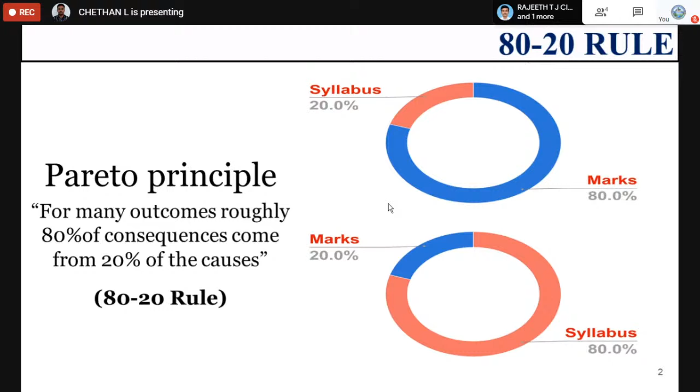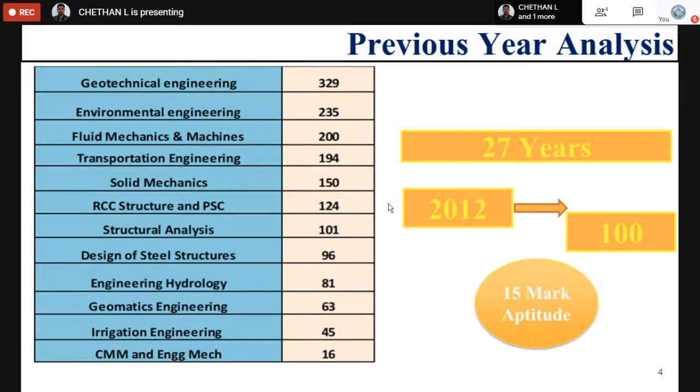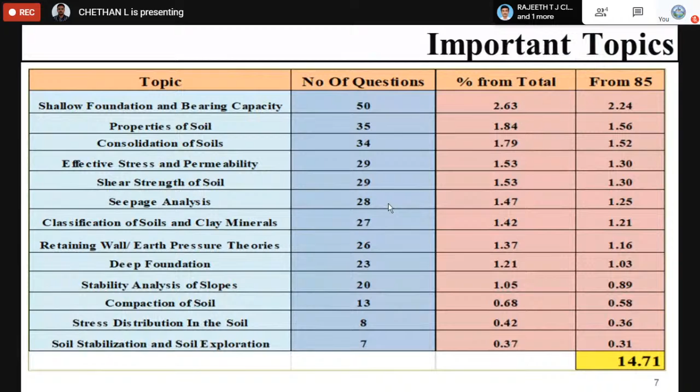So welcome you all for the day 6 session 2, especially on soil mechanics. As we studied in the previous session, session 1 of soil mechanics, we went through some basic analysis using the Pareto principle, saying that if you study 20% of the syllabus, you can get 80% of the marks. Then we analyzed some basic details regarding the previous year analysis, and took some important topics, especially important subjects, studying where particular subjects have given more importance. So then we came up with a distribution of marks for dividing the strategies. These are all things we discussed in the previous session, session 1. If you haven't looked at the previous video, please go and watch it for more information.

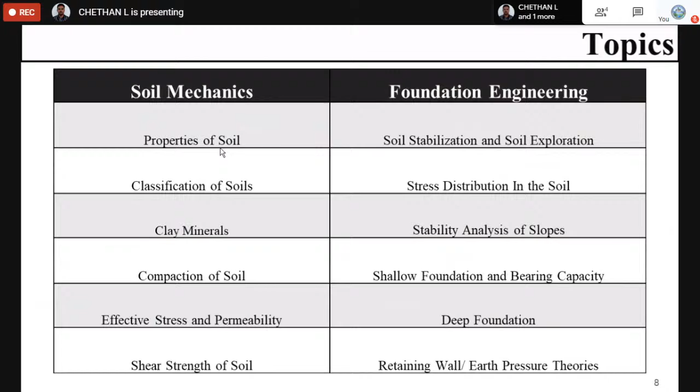As we talked about in the previous session, we covered the first 3 topics: properties of soil, classification of soil, and clay minerals of soil. So today I will be talking to you about compaction of soil, effective stress, permeability, as well as seepage analysis of soil. If time permits, I will move on to shear strength of soil. As I informed previously, the foundation engineering topics and all the advanced topics of geotechnical engineering will be covered by our HOD, SK Prasad sir, in future sessions. So this is my content.

These are the things we are going to discuss today. There are 5 major topics. One is that preparation is the main key for getting into any examination or clearing it. I will be talking about what compaction is and the important things to keep in mind while facing compaction problems. Then total stress, effective stress, and pore water pressure. I will also talk about seepage analysis, flow net, and other topics. At the end of these 4 topics, I will take you through previous years' question papers, where questions asked over the past 27 years will be covered as much as possible.

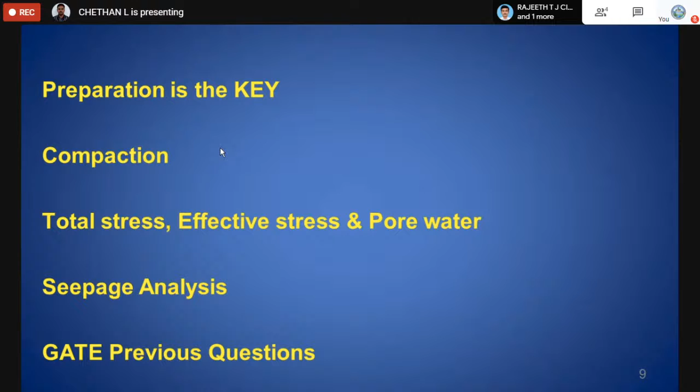Let me go to the first one, that preparation is the key. As you all know, in anything, whether it's a game or life, you won't get anything you don't fight for, but whatever you get is always a fight, right? So remember that. Whatever you want to get, it's always a fight. Don't give up on anything. Don't face anything in life with doubt in your head or mind. If you want to win in some game or in anything, and you already have doubt in your mind, you can't do that. So how do you overcome the doubt? This is the key: there is no shortcut to success. Success can only come through hard work. That is the key for preparing for the GATE exam or any exam.

So as I mentioned about the second topic, today I will talk to you about compaction. What exactly is meant by compaction? As the term itself indicates, compacting any material.

Here we are talking about the soil, so I will be talking about compacting the soil. Basically, compaction is a mechanical method of improving the property of a soil. You can observe here, if you take loose soil and put some compaction energy along with water, the water will act as a lubricant to help compact the soil. So finally, we will get the compacted soil. This is a mechanical process where water has been added to help densify the soil.

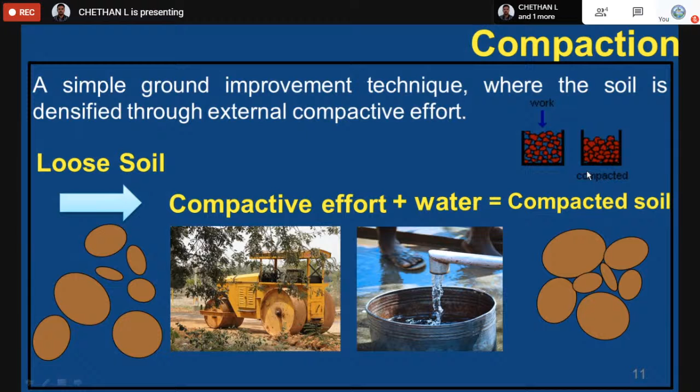Simply, you can say it is a ground improvement technique where the soil has been densified through external compactive energy. So here you see before the work, that is the loose soil, and after the compactive effort has been added, you will get the soil like this.

Okay, what is the basic principle involved in compaction? If you understand the principle involved in compaction, you can easily get at least 1 or 2 marks in the exam. Rather, if you understand the concept, in any examination you can get marks. The concept is simple. What is the principle involved?

As we keep on adding water content to the soil and keep increasing the compactive effort, the dry density of the soil will keep on increasing. It will increase up to a certain limit, then it will start to decrease. That is the basic principle. But how does it take place?

For example, when the loose soil starts getting lubricated, that is, when you start adding water to it, whatever voids are present in the dry soil start filling up with water, and the lubrication process takes place. When lubrication starts taking place, the soil particles present in the soil will reorient themselves, because there is an amount of compactive effort lying over it.

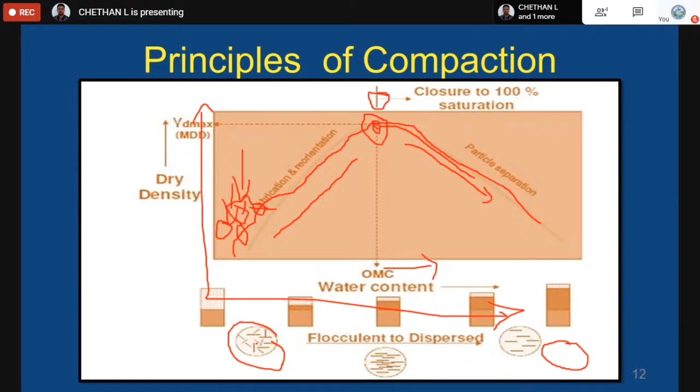One more thing to observe is that whenever we increase the water content to get the desired dry density of the soil, the flocculated structure of the soil will orient itself into a dispersive structure. As we studied in the previous class regarding flocculated structure and dispersive structure, in flocculated structure, the permeability of the soil will be more because of its irregular orientation.

When you keep on adding water to the particular loose soil, you can observe the water will try to enter into the voids.

It will enter into the soil, and even though you are providing the compactive energy to the particular soil, it will try to get more and more compressed.

As the soil is getting more and more compressed, which increases the densification of the soil, at one point, that particular point we call the optimum point.

At the optimum point, the amount of voids has been completely filled with water, and the quantity of air present is almost equal to zero. When we reach that amount, we will obtain the optimum dry density as well as optimum water content.

We also observe that reorientation of the structure will take place. Whatever flocculated structure of the soil particles was present in the beginning, it is going to reorient itself. When they start to reorient, we can expect more densified soil.

So after, if you keep on increasing the water content, whatever densified soil was present at the optimum content is again going to be very free. When they start releasing the compression stage, the amount of density we can achieve will be reduced, or it will be minimum.

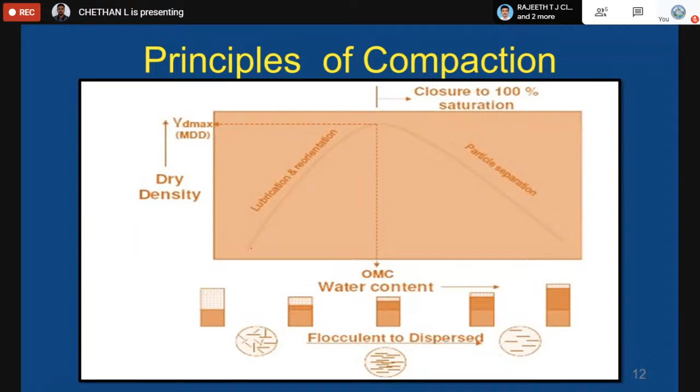As we all know, when we talk about the principle of compaction, this is the graph which has high importance in any case, because whatever practical applications we have been doing, it is only applicable on this particular graph. So what this graph shows is the compaction graph, or compaction curve, as we can call it.

Here you see, this is the point where we can obtain the optimum moisture content and optimum dry density of the soil. If the soil has an optimum moisture content, it can be exactly divided into the center where the optimum dry density has been obtained, and the left side part which is called dry of optimum.

Because at the dry of optimum, the soil has an ability to absorb water, which has an ability to lubricate. So once it reaches that particular point, it has been completely lubricated and has obtained its maximum dry density. Next, it will move on to wet of optimum.

When the soil moves to the wet of optimum, the amount of dry density will keep on decreasing even though there is an increase in water content. So wet of optimum, the optimum, it is a division.

The division is the point where we can get the optimum dry density and optimum moisture content, where towards the dry of optimum, the soil always has an ability to absorb water content, and towards the wet of optimum, the soil doesn't have an ability to absorb any amount of water.

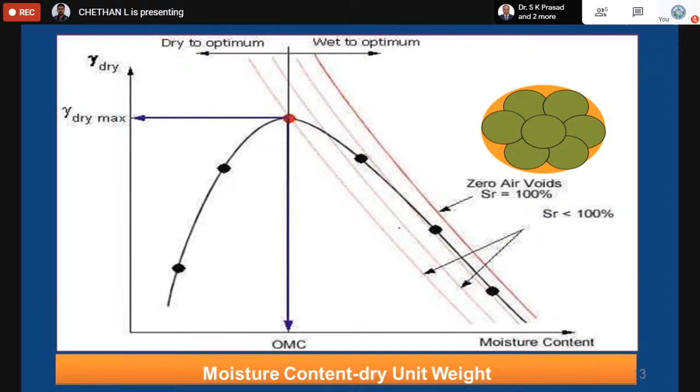When the soil is at the 100% saturation line, or zero air void line, you can observe in this simple diagram that the soil particles present here have been completely compacted, and the space shown in orange, which indicates the void space, has been filled with water. So how do we calculate the zero air void line when saturation and water content are given? Let me show you.

Before going to the problems, let me take you through a few things we have to remember, since sometimes they will ask questions based on this principle, which was developed by Proctor.

In 1933, Proctor gave a relationship between the amount of soil and the variation of water content, and he devised particular methods to calculate the compaction in the field as well as in the lab.

We know there are two tests used to calculate the compaction in the field as well as in the lab: the standard Proctor test and the modified Proctor test.

The procedure for both standard Proctor and modified Proctor is the same, but the difference lies in the compactive energy. The hammer used in the standard Proctor test is 2.5 kg, and in the modified Proctor test it is 4.5 kg.

The volume of the mold is 1000 cc, and the hammer falls from a height of 30 centimeters in the standard Proctor test and 45 centimeters in the modified Proctor test.

The only variations to observe between standard and modified Proctor are the compactive energy and the number of layers used to compact. In standard Proctor we go for 3 layers, and in modified Proctor we go for 5 layers, with increasing compactive effort.

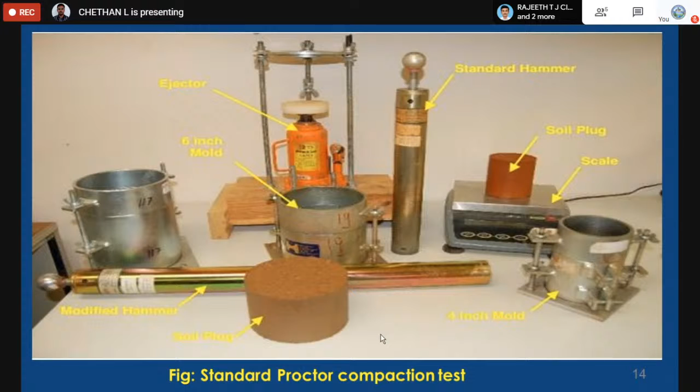This diagram shows the components used for the compaction test, and we know the standard procedure to follow according to BIS standards for both standard and modified Proctor tests.

Here is one important point to note: sometimes they will ask a question about how to calculate the compactive energy, or how to relate it.

To calculate the compactive energy, E equals N times n times W times H divided by V. This is what we have to remember.

What do you mean by N? Number of blows per layer, that is how many blows we provide in each layer, which is 27 blows in both tests. Then what is n? The number of layers. In standard Proctor test we go for 3 layers, and in modified Proctor test we go for 5 layers. What is the weight of the hammer?

The weight of the hammer we are going to use in standard Proctor is 2.5 kg and in modified Proctor it is 4.5 kg. This is W, the hammer weight.

When it comes to height of drop, the free fall of the hammer in standard Proctor is 30 centimeters and in modified Proctor it is 45 centimeters.

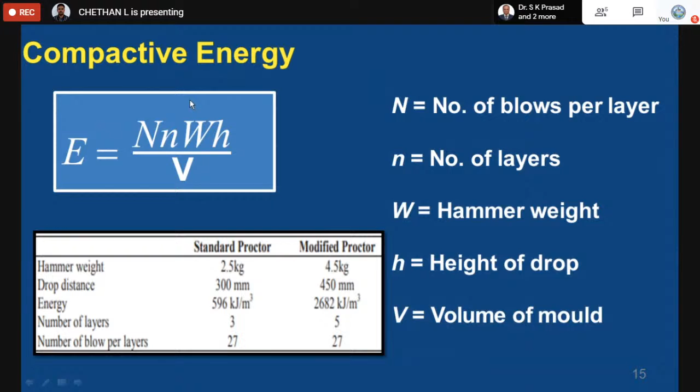The volume of the mold we preferably use is 949 cc, or sometimes we can also consider it as 1000 cc. This is the equation we have to remember to calculate the compactive energy: E equal to N into N into W into H divided by V.

As we all know, when we are talking about compaction, it's all about considering the density of the soil. To calculate the bulk density of the soil, the basic thing we have to know is density equal to mass by volume, or weight by volume.

If it is dry density, we have to relate it with the dry weight along with the water content. But when we are using the compaction curve, dry density can be calculated using gamma divided by 1 plus W.

But if you are using a zero air void line, or calculating the amount of air voids, how do you calculate it? Gamma D can be calculated using 1 minus Na into G into gamma W, divided by 1 plus WG. Here Na indicates the amount of air voids.

For example, if you take 50% air, substitute that value and you will get the amount of dry density at 50%.

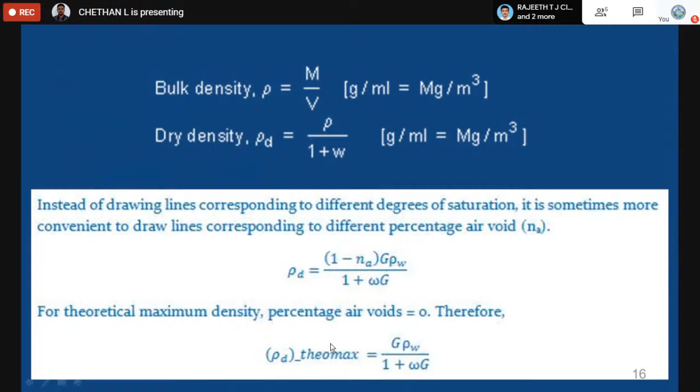Now, how does compaction affect the soil? Sometimes a question will be based on which parameters affect the compaction, and what factors are affected by the compaction.

Basically we know that soil structure, water content, permeability, the amount of compactive effort, and the type of soil are some of the parameters that influence compaction, as well as the ones influencing the structure of the soil.

From the basic principle of compaction, we saw that the soil structure will always vary as the compaction increases.

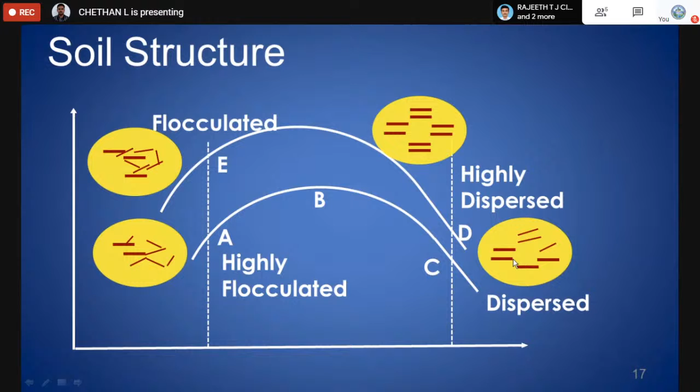The irregular orientation of the flocculated structure, as we keep adding compactive energy to increase the density of the soil, will reorient itself, reducing the permeability of the soil, and becoming more densified. So the flocculated structure will completely convert into a dispersive structure by reorienting due to the addition of external agency.

Next, how different types of soil are affected by compaction. We can see here there are different types of soils: well-graded sand, sandy clay, low plasticity clay, high plasticity clay.

As the soil gets finer and finer, it requires a greater amount of water content to achieve its own maximum density. So compaction also depends on the type of soil. The coarse grained soil will always possess a maximum amount of density compared to fine grained soil, at lower water content. Remember this.

The well-graded soil, or coarse grained soil, always possesses the maximum amount of density with the lowest amount of optimum moisture content.

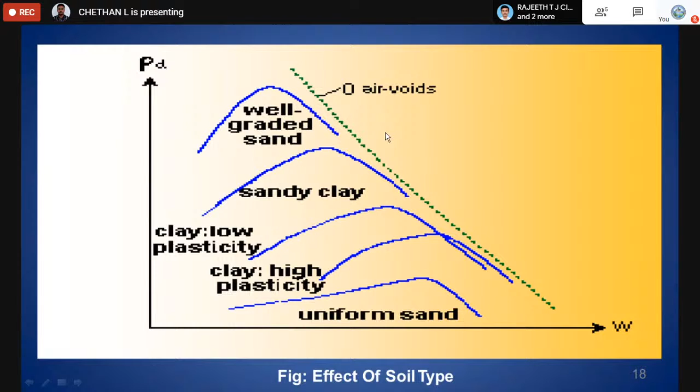To get the maximum amount of dry density in a clay soil, we have to go for maximum amount of water content in the fine grained soil. So as we know that the zero air void lines will always appear for any type of soil you consider, always on the outside of the curve, because we cannot get 100% saturation, and it is also not easy to remove 100% air from any soil because it exists in nature.

Next, how the compactive effort of the soil, the compactive energy we are providing to different kinds of soil, will affect it. When I'm talking about compactive effort or compactive energy, it is all about how much load we are putting on a particular soil to get the desired density.

Here you see there are different types of compactive effort: 20 blows, 50 blows, 30 blows, 25 blows. As you observe, as we increase the number of blows, as we increase the compactive energy in a particular soil, the optimum moisture content line will always shift left towards the curve, because the desired density can be obtained through increasing compactive effort at a lower water content.

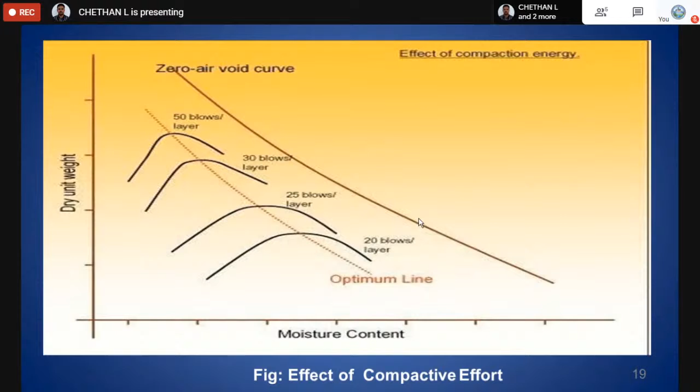For example, if I consider the first and last curve, to get a desired density with 20 blows, I have to achieve moisture content up to this much level. But with 50 blows, you can achieve the same density, even higher, at lower water content. So compactive effort always plays a very important role. If you increase the compactive effort, you can achieve a lower optimum moisture content with higher dry density of the soil.

Next, I'll talk about how permeability is affected. As you observe here, as we keep increasing the density of the soil, the permeability keeps decreasing. Remember, any soil with permeability less than 10 to the power minus 9 is considered an impermeable material.

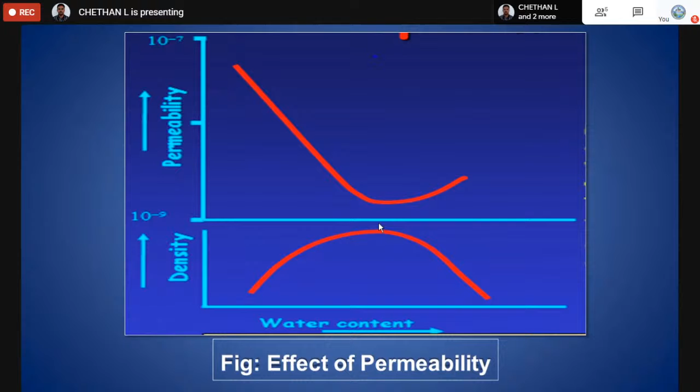Here also, I have taken 10 to the power minus 9 as the reference. As we keep increasing the density of the soil, the permeability keeps decreasing until it reaches its maximum value. Once it reaches its optimum stage, the amount of water in a particular volume of soil increases, and then the permeability again starts to increase.

Next, when it comes to the compressibility of the soil, what does compressibility mean? It's the amount or rate of compression we can expect from a particular soil. How compressibility is affected by compaction can be seen in the diagram.

Here you see, an undisturbed soil under low pressure condition will be much less affected compared to the same soil that has been remolded. The remolded soil will have a greater amount of compressibility. If the remolded soil has the ability to rebound, a high amount of pressure must be provided for it to rebound.

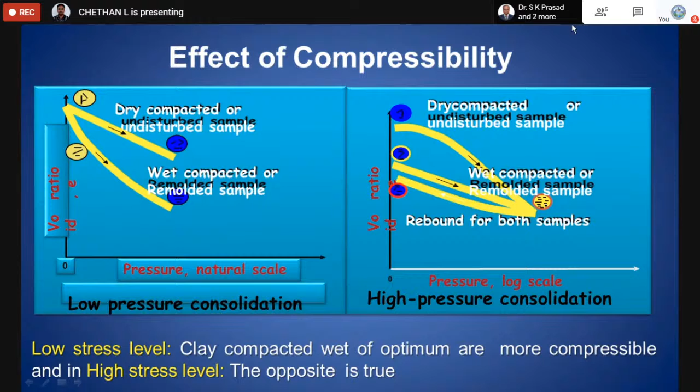Next, how does shrinkage affect compaction? To understand that, the entire compaction principle is divided into two sides. At the optimum stage, we divide the soil into two things: dry of optimum and wet of optimum.

In the dry of optimum, when we achieve the optimum dry density on the dry side, the soil has a higher swelling potential compared to shrinkage potential. Why is the swelling potential higher? Because on the dry side of optimum, the voids in the soil have a tendency to absorb water, and when it absorbs water, it has a high tendency to swell.

But what happens on the wet of optimum side? The soil's voids have already been completely filled with water.

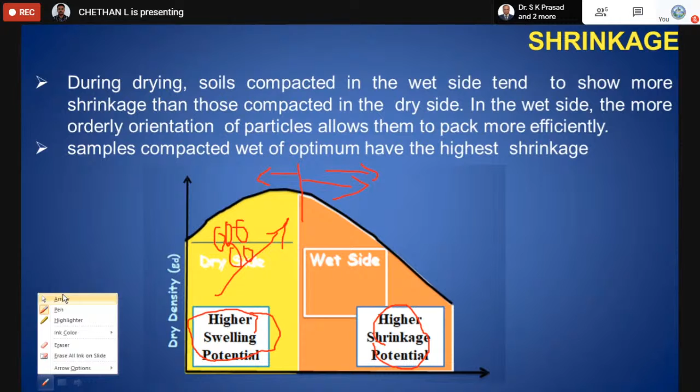Now, if you allow the water to drain, it is having ability to shrink more, because it can completely allow the water to go out of the particular soil shape. Remember, always in a dry side of optimum, the swelling potential will be more, and in wet side of optimum, always the shrinkage potential will be more.

Why the shrinkage is more? Because on wet side there will be a more amount of water in the voids, so it can able to allow the water to flow out. But when it comes to the dry side of the optimum, the soil has an ability to absorb the water, so it will absorb the water, and then it's going to swell. So the swelling potential will be more, right?

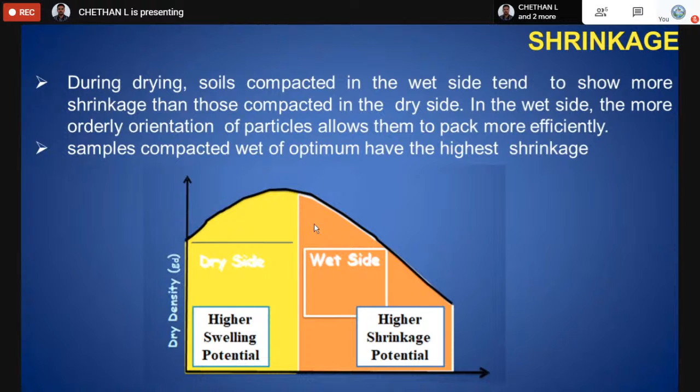So that is what written there. Next, that is the second topic that I have completed. The next one will move on to the effect, total stress, effective stress, and pore water.

So what do you mean by total stress? As the term itself, this is an important topic where you can expect more than 2 to 3 marks, and if you understand the concept, it's very easy. So the concept is very simple, fine.

So now, what is total stress? The total vertical stress acting at any point below the ground surface is due to the total weight of everything which is lying above it. For example, if I want to know what is the total vertical stress at this particular point, it is the stress caused by any material which is lying above it.

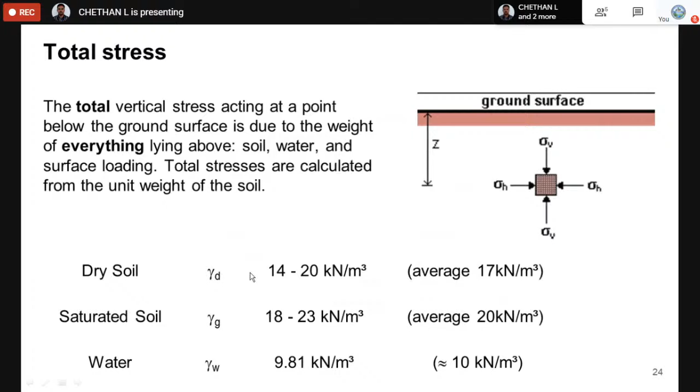Now, what is total stress? Total stress is all about the stress which is coming from the above lying material, either it might be soil, water, or anything. We can easily calculate it by multiplying the unit weight of the soil with the amount of depth which has occurred. We know that when we are talking about total stress with different kinds of material, obviously there will be existence of

different kinds of conditions in the soil. So what are the different kinds of conditions? The first condition is the total stress in homogeneous soil. We know that homogeneous means it's a unique soil where every property will be satisfied. But here, how to calculate the vertical stress when they have mentioned homogeneous soil in the problem: to calculate the vertical stress, you can go by sigma v equal to unit weight of the particular material, that is unit weight of the soil into its depth.

For the same thing, if they have given along with the river or a lake, if any water body is present above, either it might be a river or below, then the total stress we can calculate by the sum of the weight of the soil up to the particular surface and the weight of the water above this vertical stress.

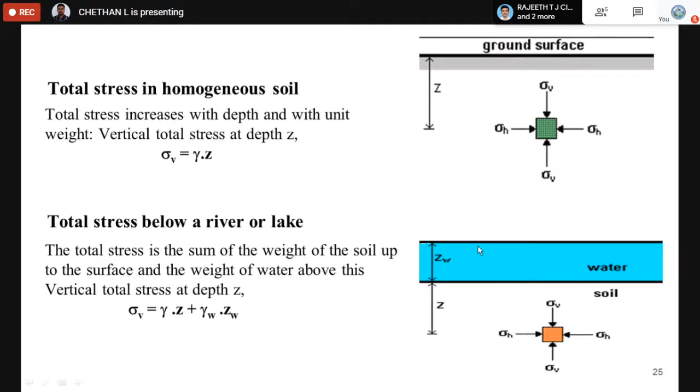So what is the amount? What is the sum of the weight of the soil which is present till the surface of the soil? Then above that, what is the unit weight of water, how much water is present above that? The sum of the weight of the soil up to the particular surface and the weight of water present above gives the vertical total stress at a depth of Z. So if any particle is located here, to calculate the total stress at this particular point, we have to consider the unit weight here plus the unit weight of water to the particular depth.

So if multi-layered soil is present and you want to calculate the total stress, you take the summation of all three layers, remembering that we have to consider the unit weight of each particular layer along with the depth at which it is located. This applies whether we are talking about unsaturated soil, homogeneous soil, saturated soil, or multi-layered soil.

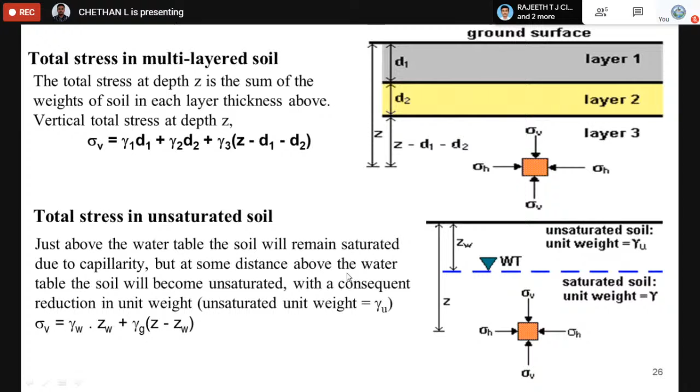So how do we calculate the total stress in that case? We have to take the total vertical stress equal to the unit weight of water times its height, plus the unit weight of the particular layer times the height, that is Z minus ZW. That is how we calculate the total stress for unsaturated soil.

Now we have covered homogeneous soil, water or lake presence, and unsaturated soil, how to calculate total stress. If surcharge load is present, how do we calculate the total stress? We use the equation: total stress equals the unit weight of the soil times its depth, plus the surcharge load, that is the amount of surcharge coming above the soil which we have to consider.

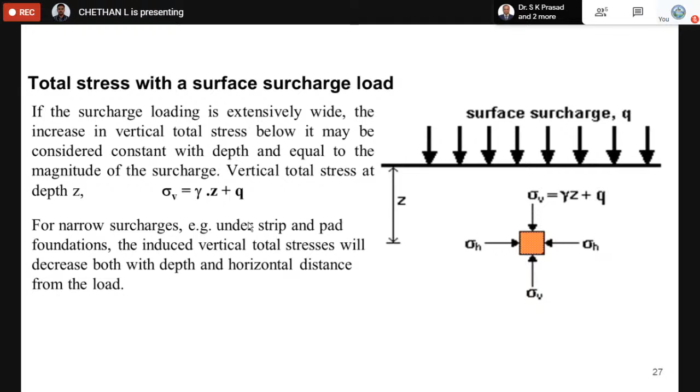But sometimes, in terms of strip or pad foundations, the vertical total stress decreases both with depth and horizontal distance. To calculate this, we use the Boussinesq equations for distribution of load. According to Boussinesq, as we move downward, the intensity of the effective stress keeps decreasing. This condition must be considered for strip as well as pad foundations.

Next, the most important and most critical concept is effective stress. Why is it important? Because any failure of soil that takes place is always influenced by the effective stress of the soil. We have already discussed total stress completely. Now, what is effective stress? Effective stress is basically the stress balanced between the pore pressure and the total amount of stress. To define it, the difference between the total stress and the pore water pressure is called effective stress.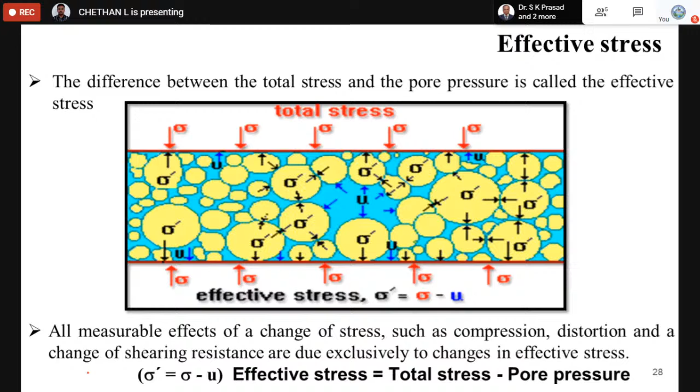Next, let's move on to some points we have to keep in mind while analyzing effective stress or total stress. If both the total stress and the pore pressure change by the same amount, the effective stress remains constant. If the amount of pore pressure and total stress change by an equal quantity, there is no change in effective stress.

The change in effective stress will cause a change in strength and change in volume. If there is a change in effective stress, it always changes the strength. That is what I mentioned about engineering properties changing when there is a change in effective stress.

Change in water table below the ground level: remember, changes in water level below the ground result in a change in effective stress below the water table. But in the same way, changes in water level above the ground do not cause any change in effective stress in the ground. So one thing to remember: any change in water level below the ground always affects the effective stress below the water table.

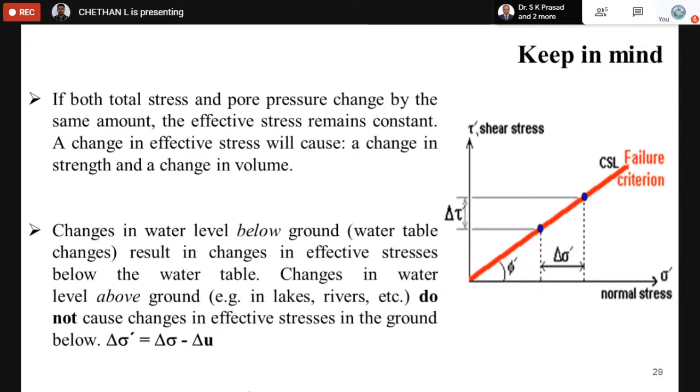Another important point to keep in mind is that the rate of change of effective stress under a loaded foundation, once it has been constructed, will be the same as the rate of change of pore pressure, and it is controlled by the permeability of the soil.

If the pore pressure in a soil slope increases, the effective stress will be reduced by that particular change, and the critical strength of the soil will be reduced, sometimes leading to failure.

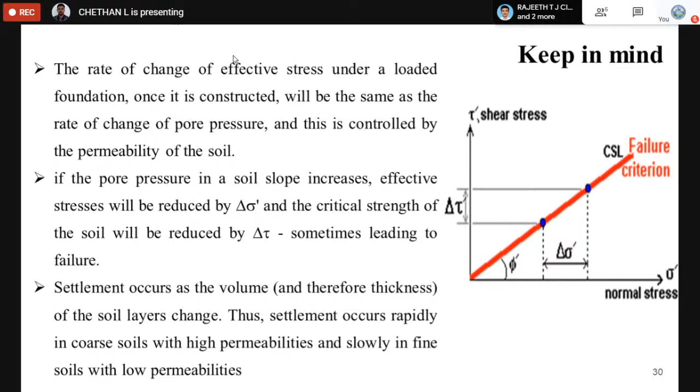Settlement occurs as the volume of the soil layer changes, which is related to the permeability of the soil. Settlement occurs rapidly, especially in coarse grained soil compared to fine grained soil, because coarse grained soil has high permeability compared to the low permeability of fine grained soil.

Next, the important topic to observe is how the volume of the soil will change. Here is the first diagram which shows that when the soil is in equilibrium, the effective stress is equal to total stress minus pore water pressure under equilibrium condition.

We can observe here there is no volume change. The initial volume is taken as V naught, the total stress as sigma naught, and the initial effective stress as sigma dash naught.

As the amount of water or pore pressure enters, there is a change in amount of delta U. When there is a change in delta U, there is obviously a change in delta sigma. So whenever there is an entry or exit of pore water, it always causes a change in total stress.

When there is a change in total stress, how much volume change can we expect? The total effective stress, which has changed due to the entry of additional delta U, is delta sigma dash equals delta sigma minus delta U, which is equal to 0 immediately after the loading.

You can observe here the soil is the same, but the volume change will take place whenever the total stress has increased by delta sigma.

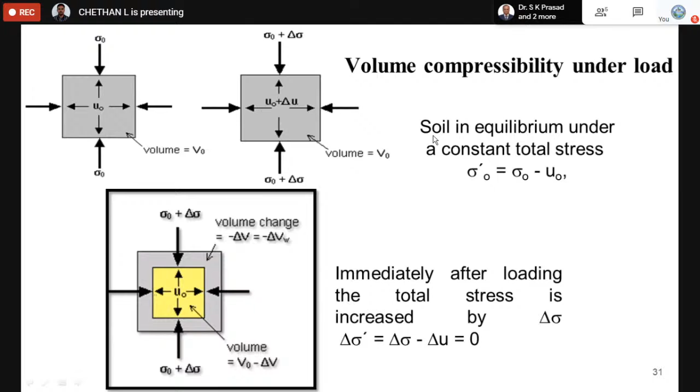So next, we have talked about total stress and effective stress. Another important parameter we have to talk about is pore pressure. What do you mean by pore pressure, or what do you mean by pore water?

The water in the pores of a soil is called pore water. The pressure caused by this particular water is called pore pressure. The pressure within this pore water, or the pressure exerted by this pore water, is called pore pressure.

What exactly is meant by hydrostatic pressure? Whenever the hydrostatic condition exists, that is, whenever the water level or water flow in the soil is at zero condition, the pressure exerted at a given point is called hydrostatic pressure, which is equal to U equals gamma W into HW.

As we know, the pore pressure or hydrostatic pressure can be measured using the unit weight of water along with the height of the water in that particular soil.

The natural static level of water in the ground is called the water table or the phreatic surface. We often call it water table, groundwater level, or phreatic surface, which basically means the static level of water present in the ground, with no change or variation in the amount of groundwater.

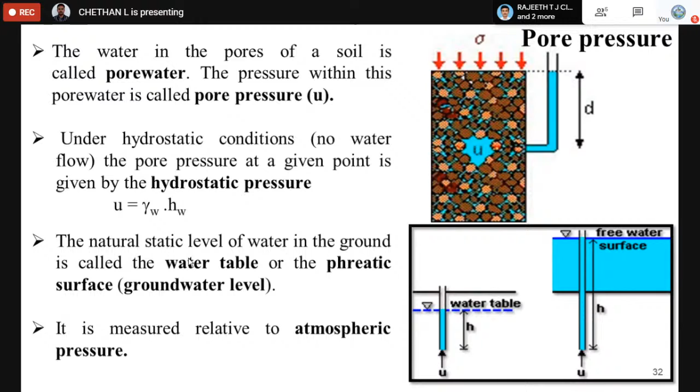To know about the groundwater table or water table, it is basically the static level of water available in the ground. It is called the phreatic surface level, groundwater level, or groundwater table, and is measured relative to atmospheric pressure. Next, how does this pore pressure vary, and what different conditions can we expect?

Consider a condition where negative pore pressure exists. We can expect negative pressure when there is saturated soil present below a particular depth, let's call it plus H. For this depth, the soil has been completely saturated, and when completely saturated, we can expect positive pore pressure. After saturation, negative pore pressure develops because the soil present above the water will have a tendency to absorb water, creating a suction head at that point, resulting in negative pore pressure.

Below the water table, the pore pressure is always positive because the entire pores have been completely filled with water. But in dry soil, the pore pressure is zero since there is no amount of water present. Therefore, in soil below the water table, the pore pressure is positive.

What about soil present above the water table? When the soil is saturated, the pore pressure will be negative because the total pore pressure leads to a negative rise of water inside the soil mass. This particular rise is basically called capillary rise.

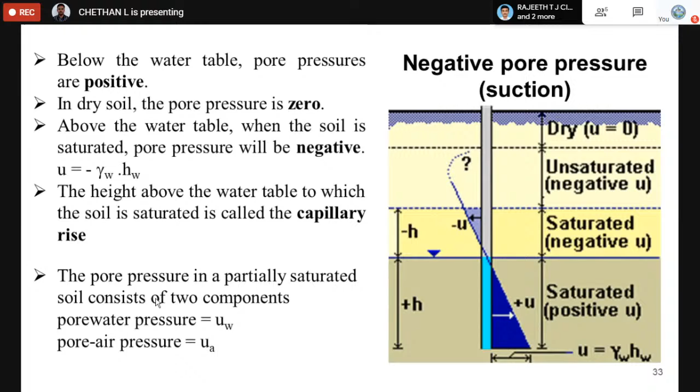Now, what exactly do we mean by the water table? It is basically the level of water present below the ground surface. When there is no flow taking place, as you can observe on the right side with the sky blue color, the water surface will be at exactly the same level in all the standpipes below the ground level. That condition is called the hydrostatic pressure condition, where the water will always stay at the same level irrespective of depth.

But how about the water table when it comes to fine grained soil? In fine grained soil, there is an action called surface tension which affects the amount of water that rises, causing capillary rise to take place. This capillary rise is a negative force because it pushes the water to rise against the atmosphere, so the water level rises to a certain extent. That particular rise is called capillary rise, which we can expect in fine grained soil.

If the water table is at a depth of dW, which is present for some amount of depth, the pore pressure at fine grained soil will always be negative pore pressure. And if it is at a depth Z that is below the water level, below the ground level, we can calculate the pore pressure by using unit weight into its height.

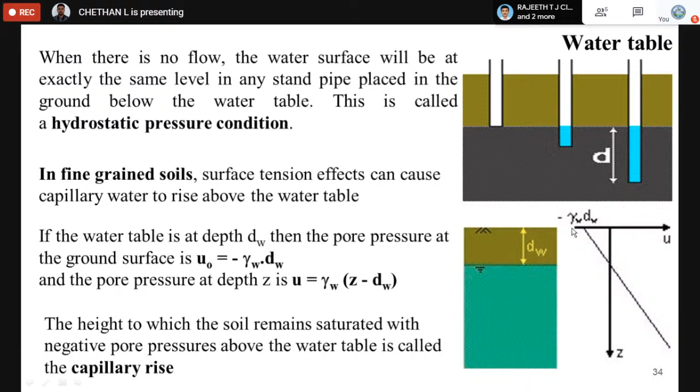Below the water table, the hydrostatic water pressure increases linearly with depth from the water table to a depth of dW. For example, we can observe a linear variation of the pore pressure even in fine grained soil, but the origin always moves towards the negative side. But when it comes to coarse grained soil, remember, coarse grained soil is also having a linear variation of the pore pressure below the water level.

Above the water level, even though the ground surface is present above the water level, even though it is at the origin or the positive side, it will be ignored. It will cause a very negligible amount of effect on the particular soil. That's why in coarse grained soil, the linear variation of hydrostatic pressure will be considered from the level of water.

What example, if you are talking about coarse grained soil or fine grained soil, what happens if the layers are composed of different types of soil layers? If water is present in different layers of the soil, it's called perched water tables. If it is a perched water table, then the distribution of the pore pressure will not be linear.

It will not be linear. It will not start with origin. It will not move to the negative side. It is a non-linear curve we can obtain in a perched water table.

Remember that. Next, I will be talking about the pressure head. So we have talked about the total stress, the effective stress, and the pore pressure. Next, I will move on to what you mean exactly by total head and pressure head in a soil. Basically, when we talked about the pore pressure, we talked about the level or the height of the particular water in the soil.

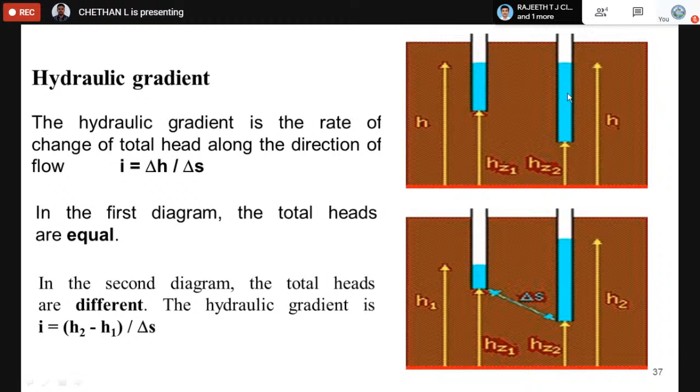If you look at the second diagram, the total heads are different, so the hydraulic gradient flow is expected from H2 to H1, that is H2 minus H1 divided by delta S. But why doesn't this happen in the first case? Because the total heads are the same, so the water level is the same in the first case.

So now, when we know about pore water pressure and total head, we have to know about Darcy's law, because Darcy is the one who related the hydraulic gradient with the permeability of the soil. So what do you mean by Darcy's law?

Darcy's law says that the rate of flow of water through the cross-sectional area A is found to be directly proportional to the hydraulic gradient. So the amount of water which flows from one point to another through some cross-sectional area, the velocity of the flow, will always vary with this hydraulic gradient, which is equal to the change in elevation with respect to the distance.

We can see here the point where water is moving from point A to point B, where the elevation is delta H and the distance is delta S. The velocity of the flow of water is directly proportional to the hydraulic gradient, which is directly influenced by the discharge as well as the area of flow.

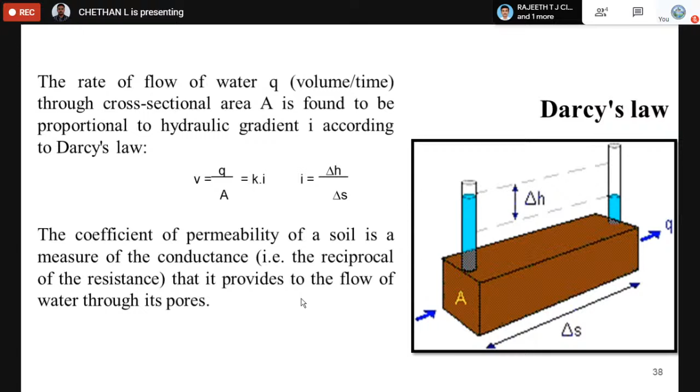How to get the hydraulic gradient? We have to observe the difference in elevation between the two piezometric heads with respect to the distance. The coefficient of permeability of a soil is a measure of the conductance it provides to the flow of water through its pores. Basically, the coefficient of permeability can be defined as a conductance against the resistance of the soil.

So many times I have been asked regarding the relationship between void ratio and permeability. Permeability of all soils is strongly influenced by the density of packing, because we observe that when the soil is on the dry side of optimum, it has a higher permeability compared to the wet side of optimum. It is greatly influenced by the density of packing, because at lower density, or dry of optimum, the void ratio is comparably higher than at wet of optimum. But how do we relate void ratio and permeability? For that, Hazen has given an equation for sand.

For a filter sand, the permeability is found to be 0.01 into D10 squared meters per second, where D10 indicates the effective diameter of the 10% finer particle, in mm. The relationship given by Hazen is K equal to 1 by K naught KT into SS whole square into E cube by 1 plus E into gamma W by eta.

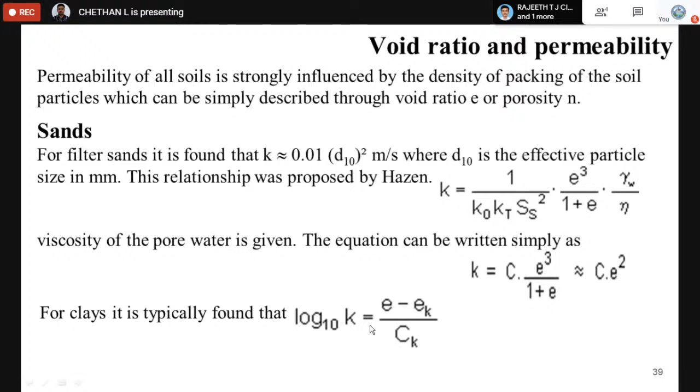For clay soil, we cannot apply the same equation. To get the relationship between void ratio and permeability in clay soil, we have to use the equation log10 K equal to E minus EK by CK. That is the equation we have to use.

Next, the another important parameter is seepage velocity. What exactly do we mean by seepage velocity? The velocity which takes place due to the seepage of water is called seepage velocity, or the rate of flow. The volume flow rate is the product of the flow velocity and the total cross-sectional area. It is the velocity of the seepage water, which is called seepage velocity.

We can easily determine this by using the total quantity, which is equal to flow velocity into particular area of the section. At a particulate level, the water follows its own tortuous path through the pores. The average velocity at which the water flows through the pores is the ratio of volume rate of flow to the average area of the voids, that is AV.

That is called the seepage velocity. What exactly do we mean by seepage velocity? It is the amount of water loss we can expect through the seepage in a particular amount of area, which is called seepage velocity.

The porosity of a soil is related to the volume fraction of the void. When you relate the porosity to the volume of voids, porosity equals volume of voids by the total volume, which approximately equals the area of voids by the total area. We can relate that, right?

So the seepage velocity can also be measured in the laboratory by injecting a dye or a color pigment or potassium permanganate into the seeping pore water, and if you note down the timing, you can observe the amount of flow and the flow path, flow nets of the soil. That we can do in a lab.

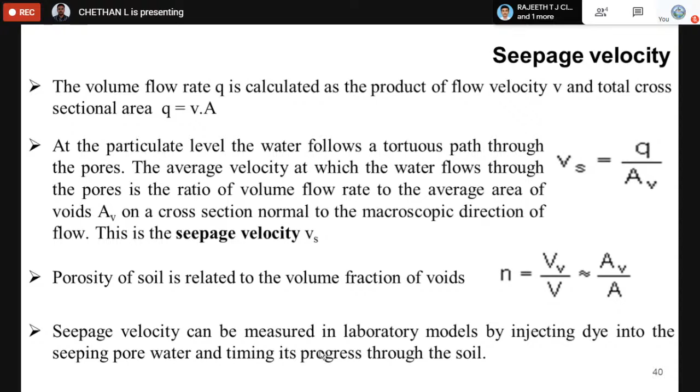Next, when it comes to the measurement of permeability, how do we measure it? Permeability can be measured in lab as well as in field, as well as through indirect methods. In the laboratory, permeability is measured by applying Darcy's law, which says that the velocity is directly proportional to the hydraulic gradient.

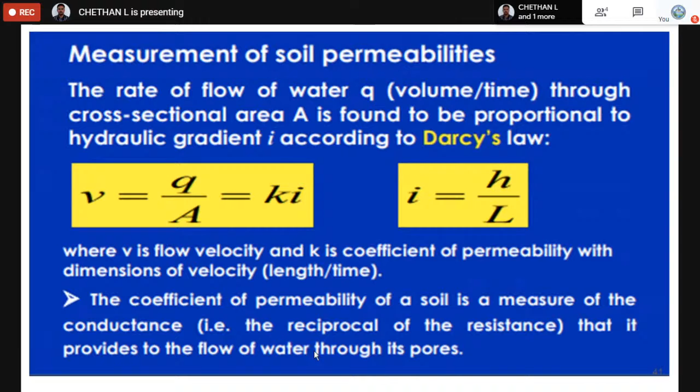The two major important tests are the constant head permeability test and the variable head permeability test. The constant head permeability test is about maintaining a constant head throughout the experiment to allow the soil to completely saturate and allow it to flow. Then we calculate the permeability of the soil using K equal to QL by AHT, where Q indicates the amount of discharge collected, L indicates the length of the soil, A indicates the area, H indicates the hydraulic head, and T indicates the time taken.

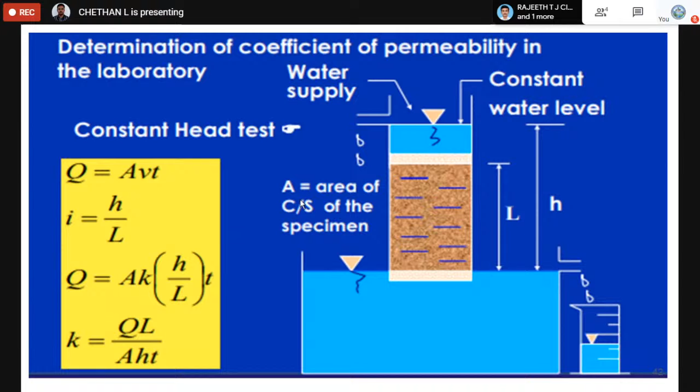And in the same way we can calculate this. Remember, the constant head permeability test is applicable for coarse grained soil. But when it comes to fine grained soil, the falling head permeability test plays an important role, where the amount of head will be varied, unlike the constant head test where the head remains constant.

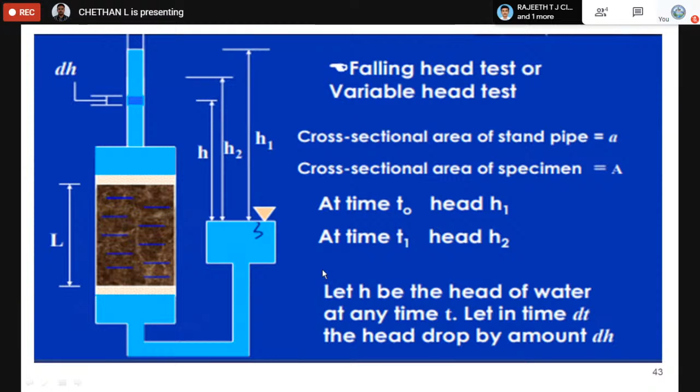In falling head test, the head of the experiment is varied to determine the amount of permeability in a soil. Here the permeability of the soil is very less. Fine soil is used to determine permeability through the variable head permeability test, because this soil has low permeability compared to the coarse grained permeability test.

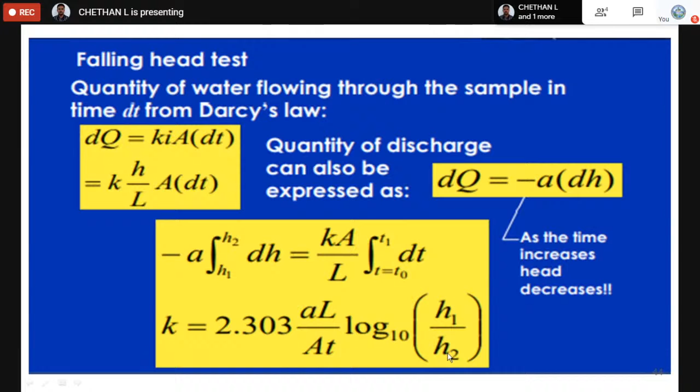To determine the falling head permeability test, we can find the coefficient of permeability using K equal to 2.303 aL by At into log base 10 of H1 by H2. Small a indicates the diameter of the hydraulic pipe, L indicates the length of the sample, A indicates the area of the sample, t indicates the time, and H1 and H2 indicate the two different heads.

The next thing to concentrate on is permeability: how the permeability will vary when there are different layers of soil present. That is the stratification of the soil. We can measure the permeability of stratified soil.

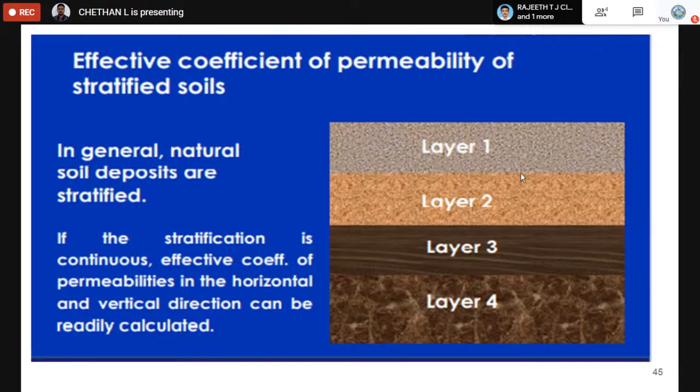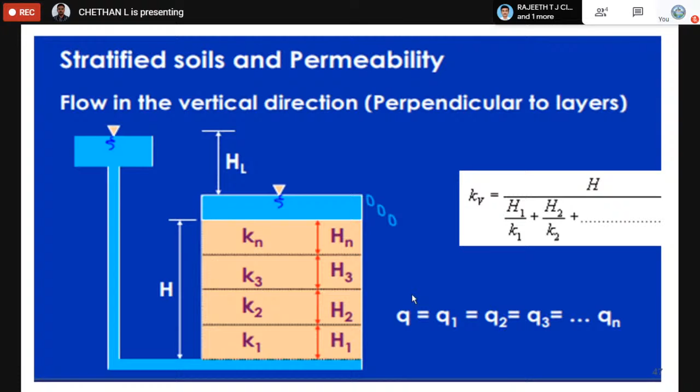The next one, I will move on to flow net. What exactly does flow net mean? Flow net is basically a graphical representation of the flow taking place in the soil, below the ground level, which represents the secondary or 2-dimensional Laplace equation. It is a net type of structure representing the flow graphically, which is called a flow net. How to represent it graphically, we'll see.

But some parameters we have to keep in mind while drawing the flow net. The flow net has its own characteristics, like 2 orthogonal sets of curves form a flow net. The curves available in the flow lines are orthogonal sets, curvilinear in shape. There are 2 major important lines to form a flow net - if you want to form a net, you require 2 different types of lines.

One is the horizontal line and the vertical line. The horizontal line, in terms of curve shape, is called a flow line, indicating the direction of the seepage flow along the hydraulic gradient. But what do you mean by equipotential line?

Equipotential line: the potential is equal at all the points or all the heads of the points, which is called equipotential line. Some characteristics to remember before drawing the flow net: flow lines and equipotential lines are both orthogonal to each other because it is a net type structure. The area between two flow lines is called a flow channel, because if the two lines are parallel to each other, the area in between is called a flow channel.

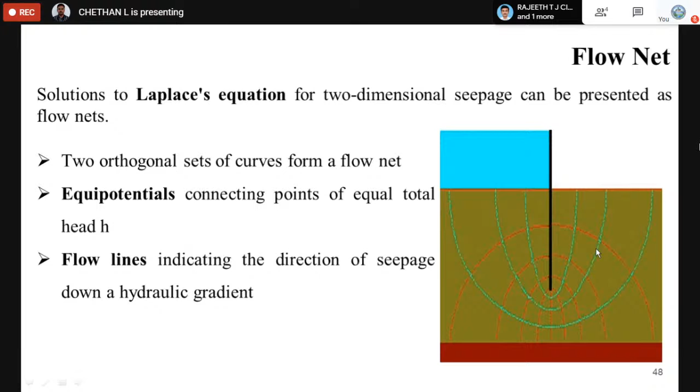The green color indicates the flow line and the red color indicates the equipotential line. The path between two parallel flow lines is called the flow channel, and these red lines are called equipotential lines, where if you insert any piezometer, the pressure at all the points will be the same. That is the characteristic we have to remember.

Next, for any problem, to calculate the total flow taking place through the flow net, we use delta H equal to H by ND, along with NF, the flow channels. We have to remember ND indicates the number of equipotential drops, and NF indicates the number of flow channels. What is the number of flow lines available here? What is the number of equipotential drops we can expect from the particular flow net? That we have to remember.

To calculate the total flow rate per unit width, Q equals NF into KH by ND, which is equal to NF by ND into KH. To calculate the total quantity of flow, Q equals NF times K times H by ND, where NF indicates the number of flow channels, ND indicates the number of equipotential drops, K indicates the permeability, and H indicates the hydraulic head.

What happens if the soil is not homogeneous — if there are two different types of layers, or n number of layers available in the soil — how do we calculate the flow net?

To calculate the continuity of velocity normal to the interface, when there is a boundary condition with two layers of soil having two different permeabilities, we use the equation tan alpha 1 by tan alpha 2 equal to K1 by K2. This is the boundary condition when two layers of soil with different permeability meet.

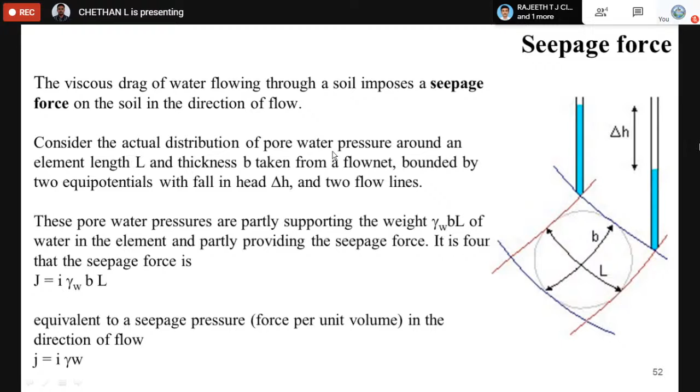That is regarding seepage flow. Now I come to the last part of my talk, which is about solving problems based on the things we have discussed in the previous cases.

So we have completely covered the topics: first we talked about compaction, then total stress, effective stress, pore water pressure, then permeability of the soil, then seepage analysis. So here I will go in reverse order: seepage analysis, compaction, and so on.

Let me take these questions which have already been asked in the GATE exam over the past 27 years, taken from a book. So the first question, what does it indicate?

The first question says: along a phreatic line in an earthen dam, is the total head constant but not zero, is the total head everywhere zero, or is the pressure head everywhere zero? What exactly does phreatic line mean? It is the topmost layer of the seepage line, where we can expect the pressure head to be equal to zero with respect to atmospheric pressure. So the answer for the first one is that the pressure head is everywhere zero.

Why is that? Because we know that the phreatic line is the topmost seepage line we can expect in an earthen dam. So what is the second one?

The number of flow channels and head drops are 4 and 12 respectively. If the difference in the upstream and downstream water level is 3 meters, what is the discharge per meter width of the sheet pile wall if K equals 0.1 meter per second? They have given flow channels as 4 and potential head drops as 12, with the difference in upstream and downstream water level being 3 meters. What is the discharge per meter length of the sheet pile wall with K equal to 0.1 meter per second?

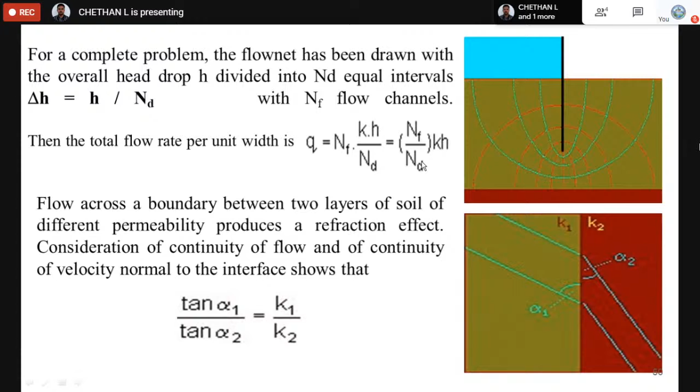If we substitute, the answer we get is 0.1 meter cube per second per meter. So that is the answer for the second question.

What is the third question? Write true or false: flow lines and equipotential lines in a flow net are orthogonal to each other. Definitely, when there is a flow net, the flow lines and equipotential lines are orthogonal to each other. So it is true.

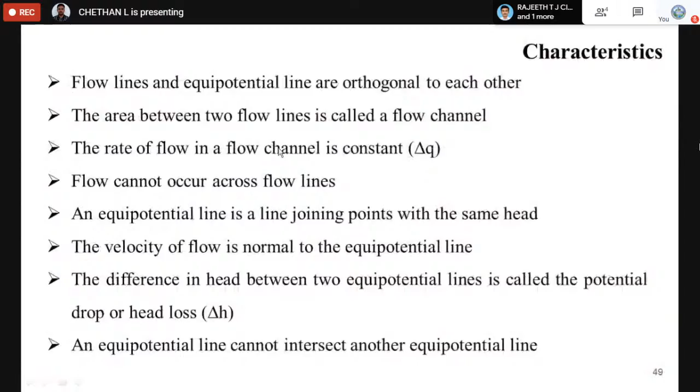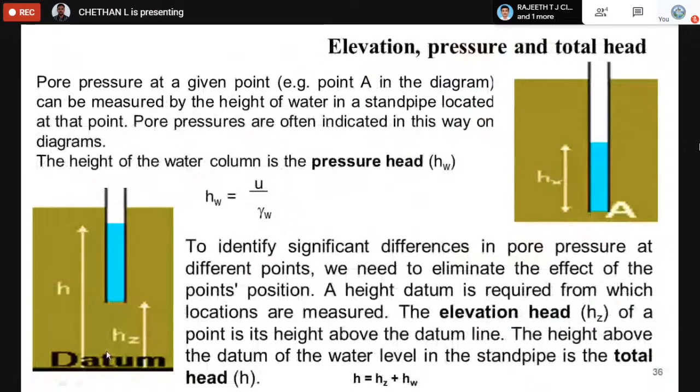So what is 5.5? The hydraulic head at a point in the soil includes the pressure head as well as the datum head, as we saw earlier. We know that in any particular soil, the total head always includes the datum head along with the pressure head. So that is the answer for the fifth one.

Next one: seepage force per unit volume can be expressed as what? To represent the seepage force, we take the hydraulic gradient with the unit weight of water. So the answer is hydraulic gradient multiplied by unit weight of water.

Next, 5.7: piping in soil occurs when the soil reaches shear strength of 0, which happens when the effective pressure becomes 0. The soil may be highly porous, no problem; there may be a sudden change in permeability, no problem. But when the effective pressure becomes 0, the total stress will be 0, and the soil completely loses its shear strength. Only when it loses shear strength can we expect piping to happen.

So what is the next one? The soils most susceptible to liquefaction. Liquefaction occurs when the soil reaches its critical hydraulic gradient with the quick condition, and this type of condition is basically expected in sands.

What options are given? Saturated dense sand, saturated fine and medium sands of uniform particle size, saturated clays of uniform size, and saturated gravels and cobbles. Saturated clays of uniform size, definitely not. Saturated gravels and cobbles, definitely not. Quick sand condition cannot take place in those two cases.

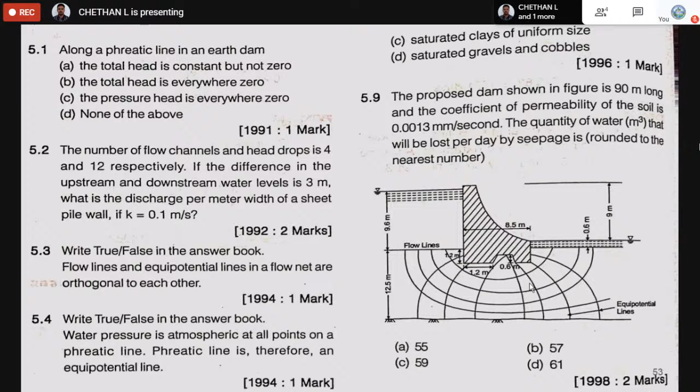Next, 5.10. What is the critical hydraulic gradient for a soil deposit with specific gravity 2.71 and in-situ void ratio 0.85? How to calculate the critical hydraulic gradient? We just saw that it can be calculated using IC equal to G minus 1 divided by 1 plus E.

So the specific gravity and void ratio are given, you can easily calculate the amount of critical hydraulic gradient. The answer for this will be 0.92.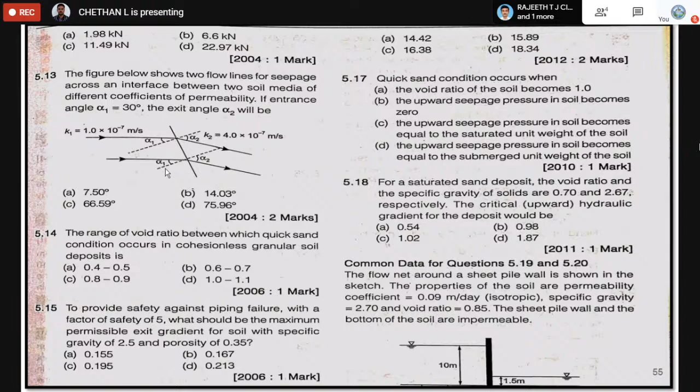I'm running out of time, so let me move on to the second topic, that is compaction. What is compaction? We have studied this throughout. Let me take some of the questions now.

The unit weight of the soil at zero air voids basically depends on what? It depends on specific gravity, water content, unit weight of water — all of the above, because we know gamma D equals G into gamma W divided by 1 plus WG, where we can relate the specific gravity, unit weight of water, and water content. So the answer is all of the above.

True or false: the measure of compaction is its wet density. No, it's false, because compaction is measured with respect to dry density of the soil. In a compaction test, as the compaction effort is increased, the optimum moisture content will decrease, as we observe through the graph.

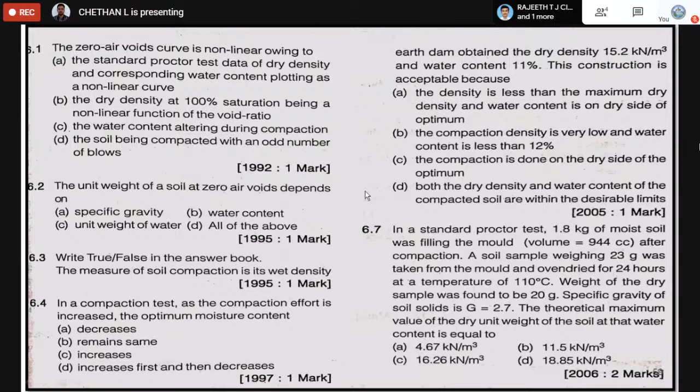Here is problem 6.5: compaction of an embankment carried out in 500 mm thick layers. The rammer used for compaction has a foot area of 0.05 meter square, and the energy imparted in every drop of the rammer is 400 Newton meter, assuming 50% more energy in each pass over the compacted area due to overlap.

How to convert it? Initially we have to calculate the maximum dry density we can obtain, the number of layers, and then take the amount of energy from the standard Proctor test. What are the number of layers used? What is the compactive effort given? Then compare both, and you will get the answer.

Next one: compaction by vibratory roller is the best method of compaction in case of which one? Vibratory roller — whenever vibration is given to compact, it is always for sand, because if the soil has some cohesion, vibration will not work. If you take sand in your hand and vibrate it, the sand will compact. But if you take soil and shake it in your hand, it will not compact.

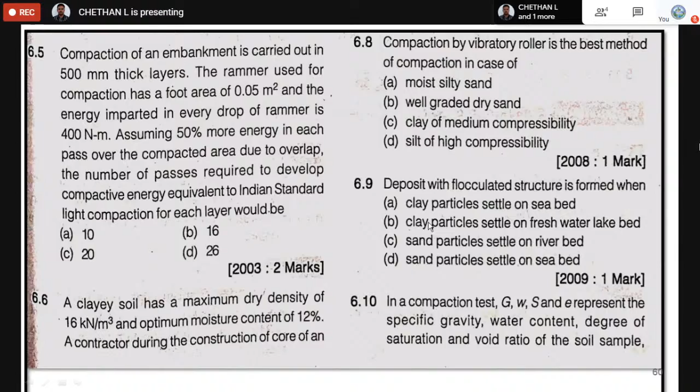Let me take one more last question in compaction since I'm running out of time. In a compaction test, G, W, S, and E represent the specific gravity, water content, degree of saturation, and void ratio of the soil sample respectively. Gamma W represents the unit weight of water and gamma D represents the dry unit weight of the soil. The equation for zero air voids is gamma D equal to G into gamma W divided by 1 plus WG.